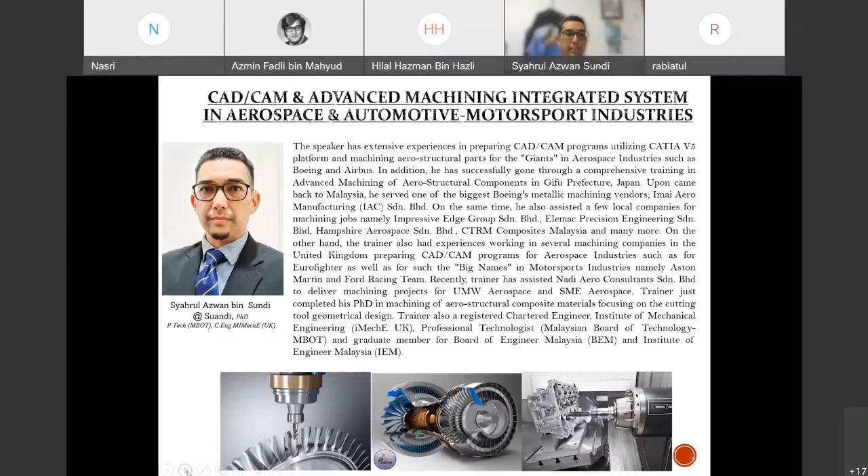Let us glide through some introduction on what CAD-CAM basically is. Computer aided design, that is CAD. Normally the industry out there definitely embeds or adopts a CAD system in their current daily production, so it's very vital and important nowadays. Almost every company and industry out there adopts this kind of system.

The CAD system allows us to do design and validation of the design. Then when it comes to CAM, computer-aided manufacturing, this is where my expertise comes in. Once we have designed everything in the CAD system and visualized it, we want to make it a real physical part - that's where CAM takes place. Basically in CAM we prepare the toolpath for CNC, computer numerical control.

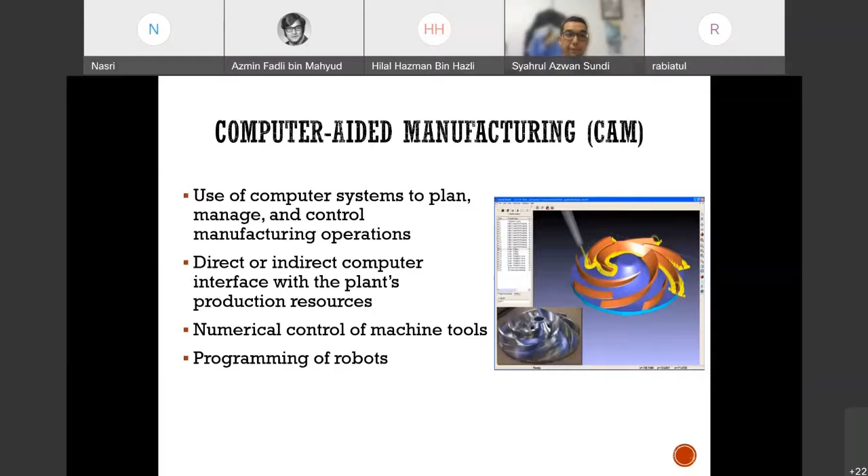So that is the toolpath we have prepared in the system, then we translate it into the controller. Once posted into the controller, the machine will actually machine according to the toolpath created in the CAM system. So CAD and CAM integrate together in the virtual world before we translate into the real machining world, the physical machining part.

Nowadays, almost every precision industry calls it virtual brainstorming - every single thing you have in mind, you translate into a 3D CAD model. This makes it easier for others, the layman, or the rest of the department to understand what's in your mind, so you can put everything into the virtual world. That's why full digital prototypes or 3D systems translate into the prototype.

These are the so-called end users of the CAD model. Once you have the design, the CAD model already established, where can we post this CAD model or design? Normally the most famous in industry is CNC manufacturing - that's where I'm currently in right now, my field, and of course the rest of the team as well.

Then there's rapid prototyping, part of IR 4.0, Industrial Revolution 4.0 - 3D printing, rapid prototyping. We also have automation, design, detail and form, visualization, and part of it going into simulation analysis.

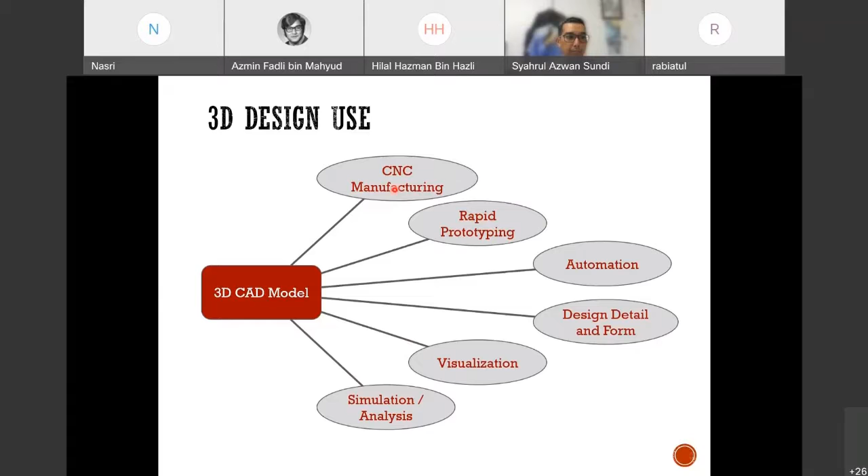All right, so this is the 3D downstream benefit. We have CNC manufacturing to manufacture one, and then we can do mass production of this from the CAD system and the CAM system that we have translated.

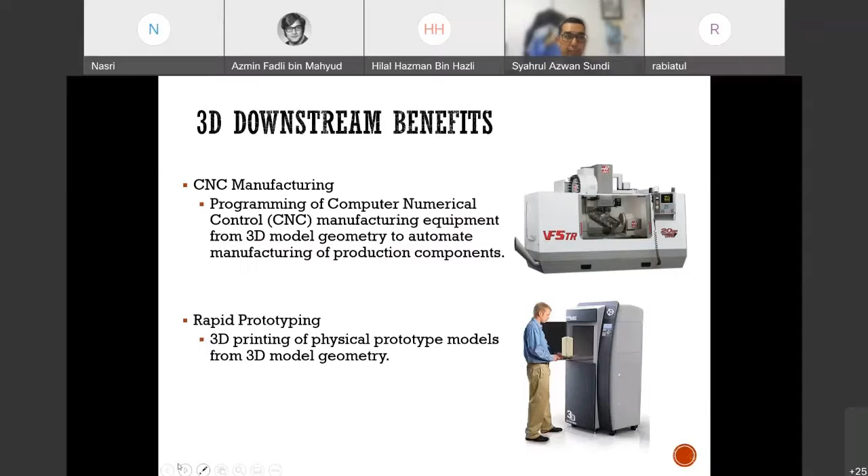Besides that, we also have rapid prototyping that I mentioned just now. Based on the design that we have created, we can validate the design by using rapid prototyping. The design detail form is how we can put everything based on our design. All the details of the design can be translated to physical parts

from the CAD and CAM system that we have. And last, I think, is simulation and analysis, which we mentioned just now. We can do certain simulation and analysis, stress analysis for example. We also have other analysis, such as CFD, computational fluid dynamics, which can also be done in the software right now, before we proceed with the next stage, which is the prototype stage.

All right, this is some fundamental, basic understanding or knowledge in terms of CNC. Once we have the CAD system and CAM system in place, when we have created the toolpath, we have to translate and transfer everything into the CNC, or so-called computer numerical control.

So based on the machining, we have various types and configurations in the market right now, and various brands that I can share with you guys later on. So this involves all the axes in the machining, and this is part of the 5-axis machining involved. We have all this as part of UTEM facilities in the shop floor, in our laboratories.

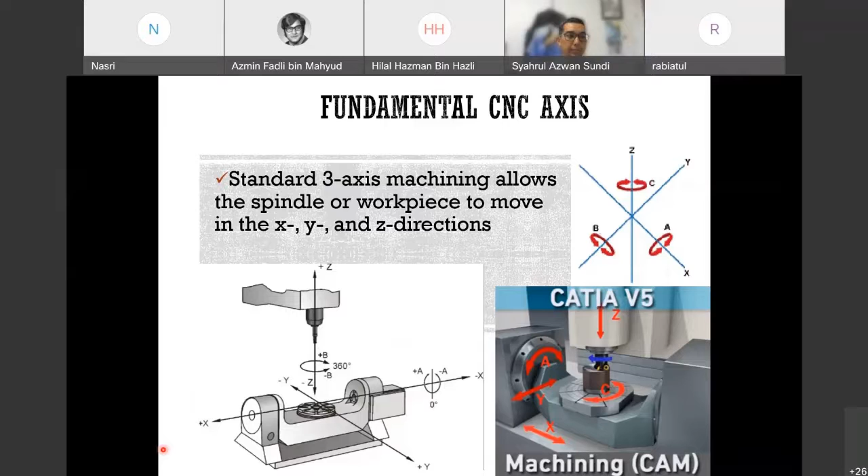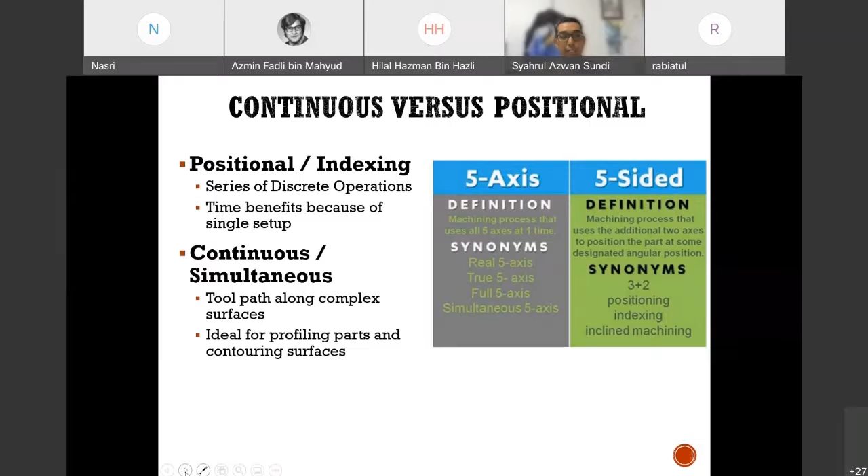This is also a kind of variation when people are talking about 5-axis. Nowadays the designs are getting more complex, more sophisticated. If you can see, or realize, the design of cars right now is totally different compared to 10 or 20 years ago. So totally different, and the challenge to manufacturing is definitely very, very high. That's why we have to have this kind of recent technology to support the manufacturing processes.

These are examples of solution providers or software available, some of them really focusing on CAM field rather than CAD/CAM. These are the ones available in the market out there: CATIA Machining, Hypermill, NX CAM, SolidCAM, Power Mill. As far as UTEM is concerned, we are focusing on CATIA Machining, which will be our first core business or core subject embedded in our curriculum.

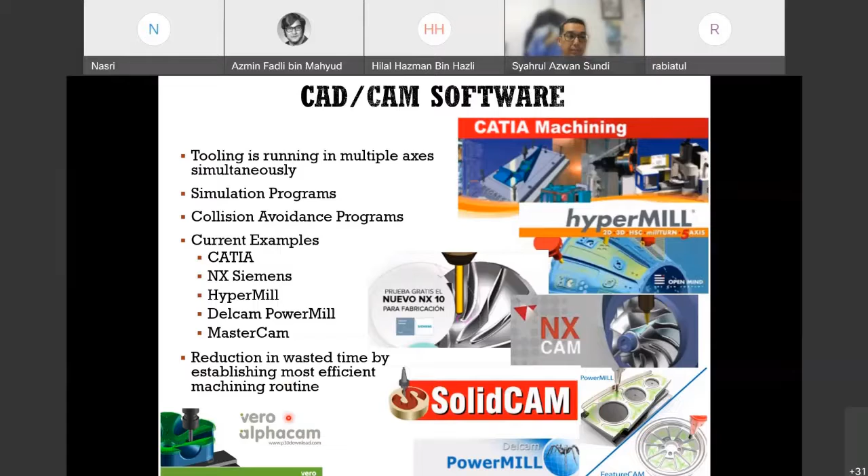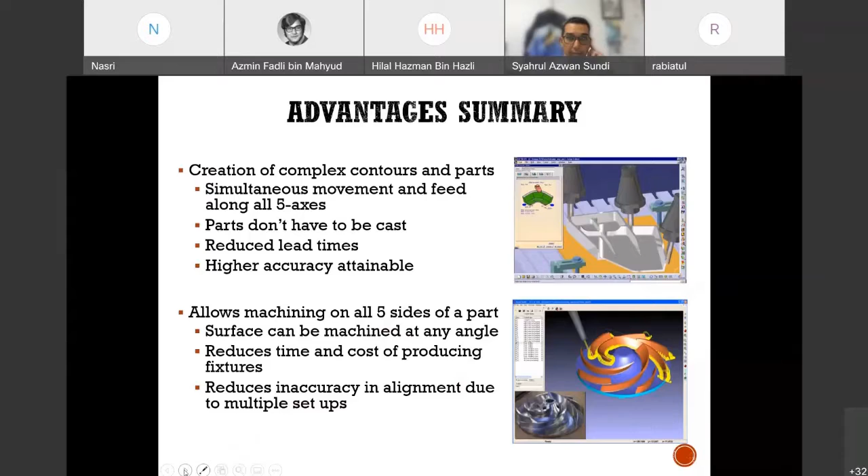The accuracy of the part will definitely increase. This is also an advantage in summary - with the 5 axis in place we can approach a certain area with only a single setup, machining this area, that area, and other areas by holding only a single setup. This is a quite famous part always machined by using 5 axis, we call it turbo machinery turbine blade, which is also involved in complex machining and CAD/CAM system.

Besides that, we also have the disadvantage, which is related to the large investment, because the machine is not that cheap, and the solution system is quite expensive as well.

CATIA itself will cost the company more than 100K Malaysian Ringgit to invest in the first stage. Then they have to groom a highly skilled programmer to create the cutting tool or toolpath program. And finally, of course, the maintenance of the machine will also incur a certain cost. So that's part of the disadvantages of embedding this kind of system.

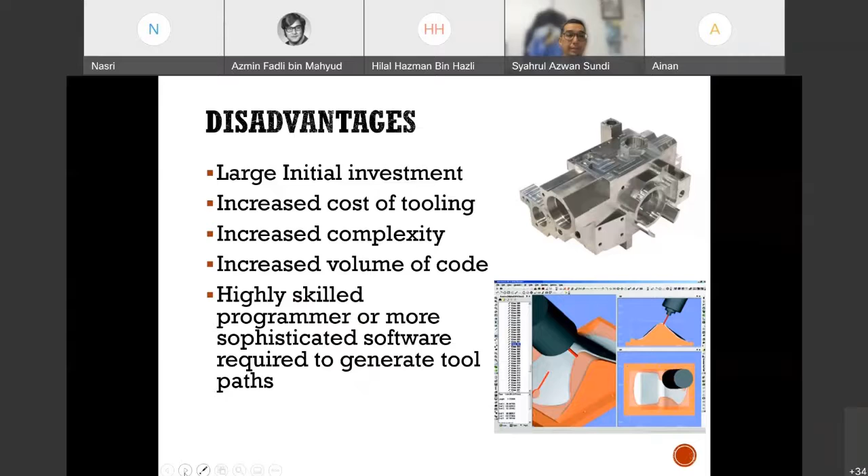From now on, I would like to share a little bit based on CADCAM and advanced machining systems. Some examples that I've gone through with industries out there, and then probably we can realize how important it is that we need to really stand together with the industries out there. So we do have all those facilities in-house.

We do have the software also in-house. In fact, we've embedded our curriculum with the current demand of the industry, with the current software that they've been using. So definitely we can actually be together with the community as well as the industries out there.

So this is just a sharing of how I myself started to jump into this area. There were a few of us, four of us, who went to Kakamigahara, Gifu to go through the training for 3 months before we came back to Malaysia.

And then this kind of example from the CAD and CAM system, how we translate it into the CNC, and finally we produce the actual part. So this is an example of a project that we carried out with CTRM, our neighbor actually. There are a few projects that we have gone through with CTRM, thank God on that.

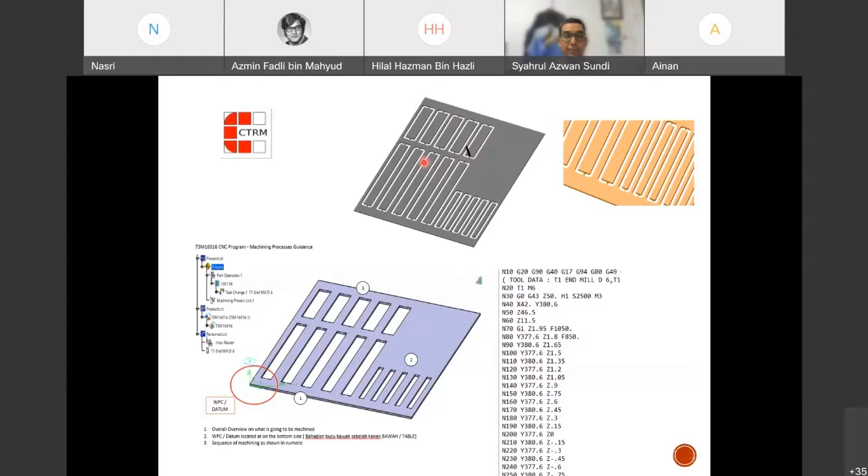So we do have the CAD provided by the company, and we need to create the toolpath, the so-called CAM system. Finally, this CAM system or toolpath will be translated into G code and M code, and this will be sent into the machine before we do the physical machining. This is also part of it.

We can actually just create the toolpath, how we're going to do what we want in the toolpath, and the next pass, the movement of the tool from one point to another, the type of cutting tool, diameter, and everything. You have to define everything. Then the system itself will translate it into the program, so we just put it inside the machine and do the setup. But of course, the fundamental knowledge of machining, cutting tools, and cutting strategies, we have to have that knowledge before we can go into this phase.

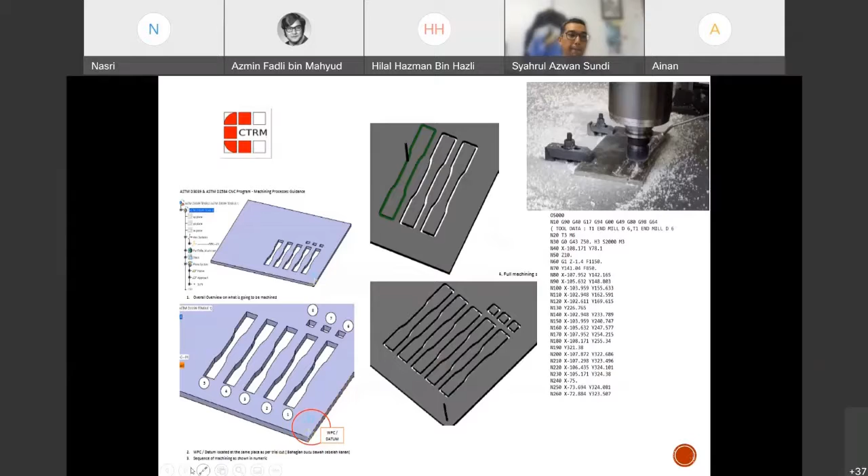So this is part of a project that we have gone through with CTRM. It's part of aerospace, but this is not a flying part. This is an example part.

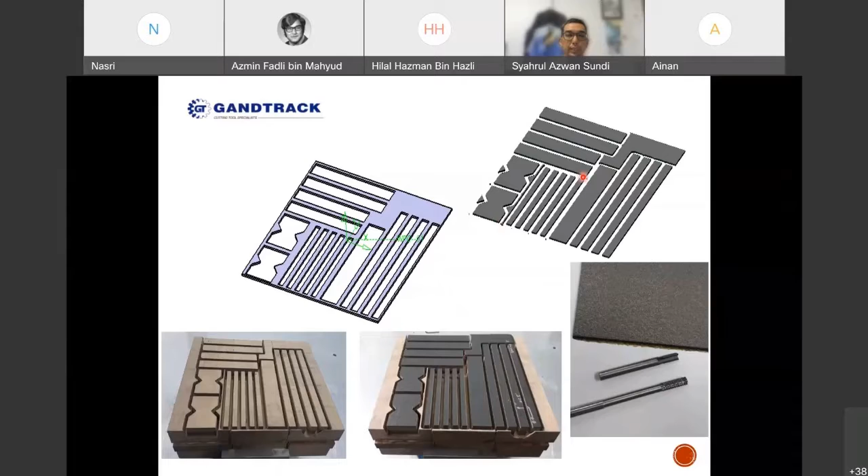This is another example of validation of composite material. Before this, it was glass fiber reinforced plastic, GFRP. This is another different material, but a very famous one used in aerospace and aerostructural industries - CFRP, carbon fiber reinforced plastic. We have different cutting tools, and what we did was trim it to a certain ASTM standard for them to do the validation.

This is also another project which also involves a CAD system. From the CAD system, we translate into the CAM system. We have the cutting tool, we have all the shapes that we want to machine, and finally we produce the actual part.

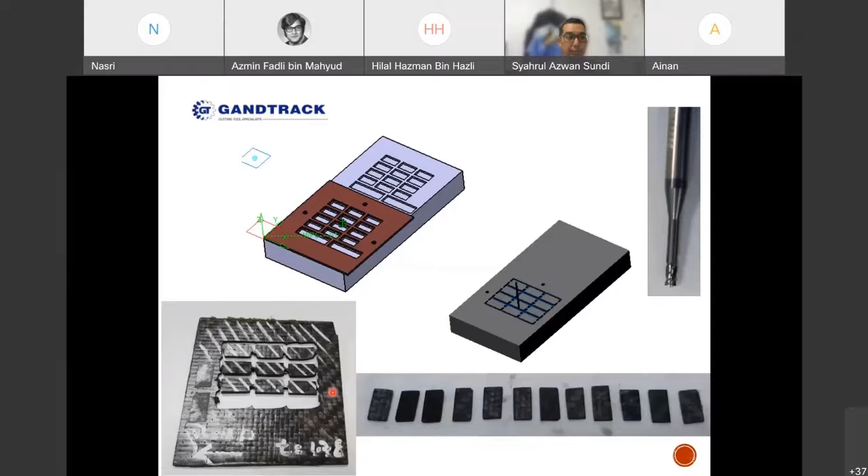All right, this is another example. This, if I'm not mistaken, was the first trial of wet panel or out-of-autoclave panel. So Airbus tried to produce a composite panel without the curing process of autoclave. They succeeded, and this panel is already being used for A350, if I'm not mistaken.

And this is also an example of the beauty of the CAD system from a so-called 3D scanner, part of rapid prototyping or 3D printing. We have a 3D scanner which we use to scan the geometry of this cutting tool, and we can actually do any measurement from here, extract all the data, and reverse it at any time. So this is part of reverse engineering, also involving a CAD system.

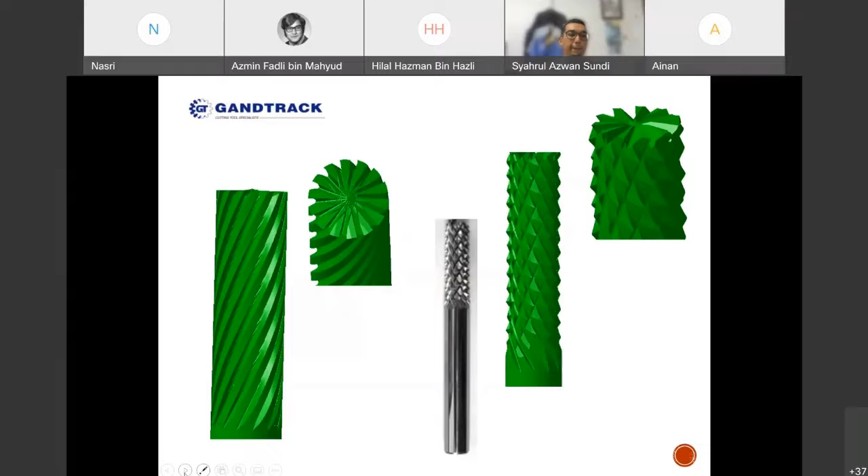All right, this is also another example, but it's a different material. This is a metallic material, and this is also part of a trial phase, trial progress in our laboratory. As you can see, this also involves a CAD system and translates into the real machining.

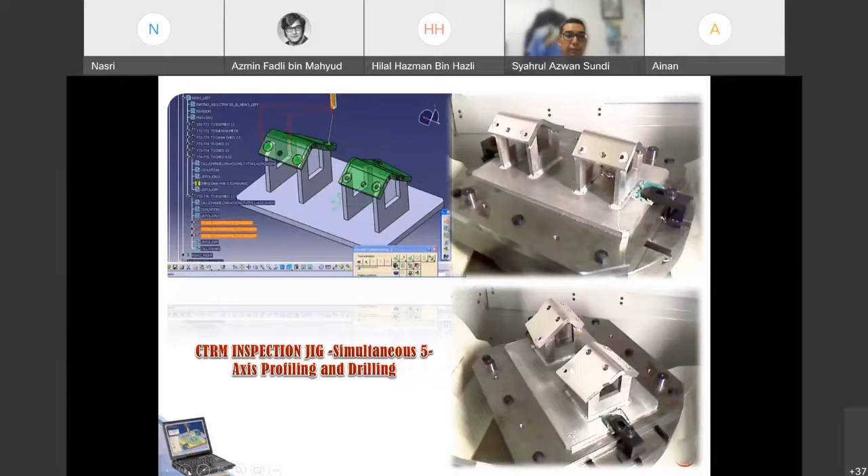All right, so this is also a real part, but it's not a flying part. This is an example of fixture or tooling. This fixture needs to be produced for CTRM, for example. They produce the composite restructuring material, so they have to lay it out on top of this tooling or fixture. We have involved nearby industries to provide this kind of service.

This is another example where we are given the CAD model for how to produce this one - not only the knowledge or skill of how to use the software, but we have to have the skill of how to perform the real machining. Being an expert in CAD/CAM software is not enough to produce a high precision part. We need different knowledge and skills in different fields to produce a certain specification given by the drawing.

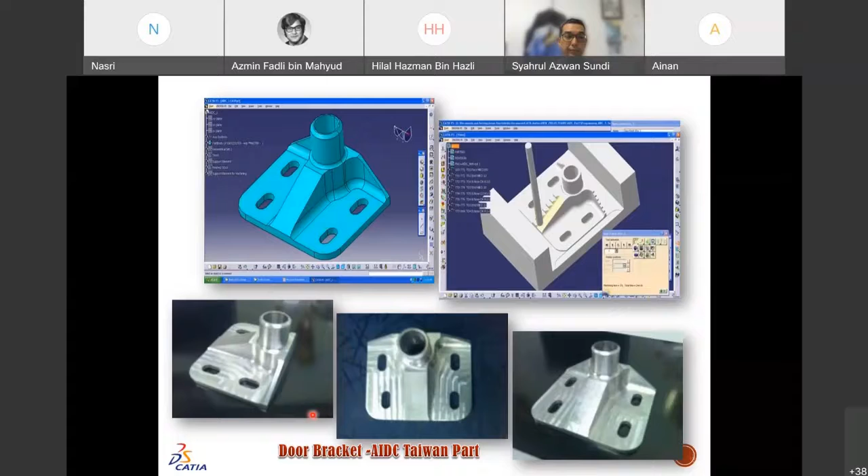For example, this is part of an actual flying part from AIDC Taiwan. It was produced, if I'm not mistaken, a few years ago. This is part of FAI, first article inspection.

So we do have the CAD system over here. The CAM system is not shown here due to certain secrecy. But anyway, what we can see from here is how to translate from the virtual to the actual - the CAD and CAM system will actually be involved in order to assist us through the whole process to get the physical part. This part is going to be the one that our client or customer needs, and this is the final business of the industries, especially in aerospace industries.

So this one is very challenging, because if we fail to produce or make any mistake during the machining, the whole piece will be rejected. So the cost of the whole piece is definitely very expensive. That's why we have to be very, very careful to produce based on the specification given, and ensure there is no mistake during the machining or during the programming.

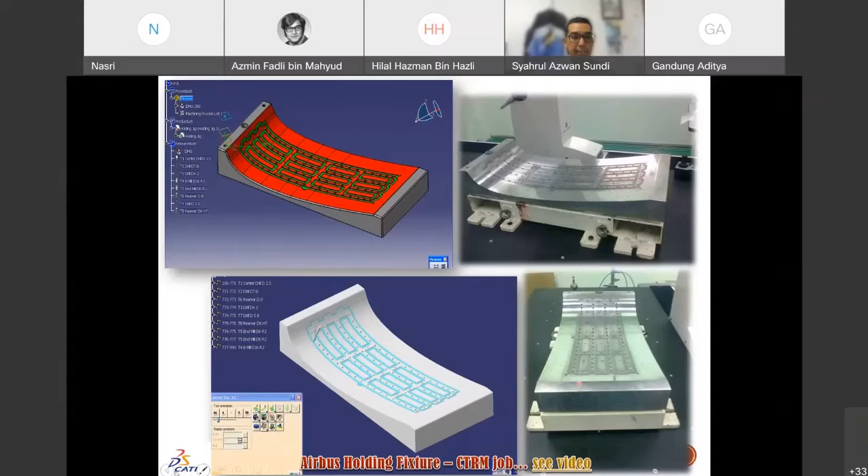All right, so this is another example of a flying part. The previous example was a tooling fixture; this is the actual flying part. What we can see from the CAD system, we do have the table - an example of the actual table created in the CAD system, in 3D. And then we have the fixture or tooling, and the flying part to be machined on top of the whole system.

So what we have here is the whole system created in a 3D model, embedding everything inside one system. Then during the machining, we can actually visualize and simulate whether there will be any collision or not before we proceed to the actual machining in the CNC machine.

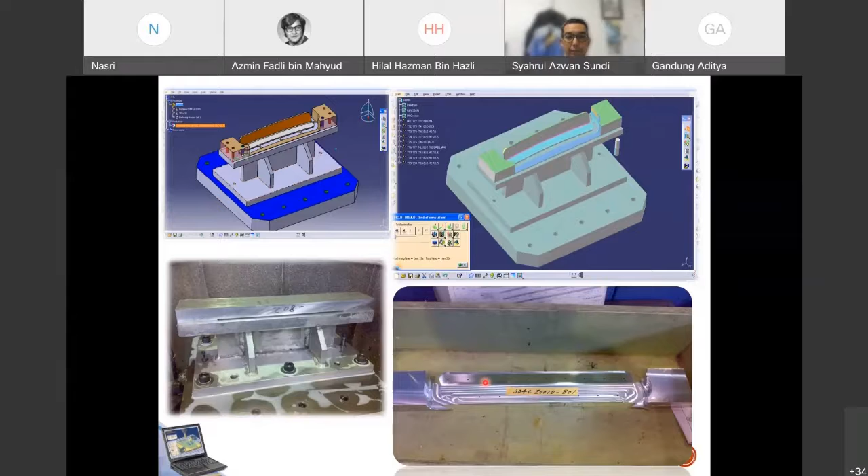And this is the final product that we have produced. All right, this is kind of overall sharing that I can share with everyone on the shop floor. What we have over here.

Well, this is a current practice in actual aerospace industries. What we always have during the discussion with the client and during the so-called bidding process before we secure the project, we always provided the CAD model. So the client always provide the CAD model in order for us to know the difficulty levels of each part that we're going to machine.

So based on this CAD model, we need to create so-called cutting planning. This cutting planning normally needs an experienced person, normally 1 to 2 persons in one industry. They have been working for more than 10, 15 years. They have more experience in terms of how is the best clamping system in producing this part.

So once we have this one and created the so-called virtual cutting planning, then we have this part. This is the CAM section. So we have the CAD system, the CAM section. We put everything, all the cutting tool, all the specification that we need, and finally we try our best to obtain the part more or less to the one that we have planned earlier. So this one will be translated.

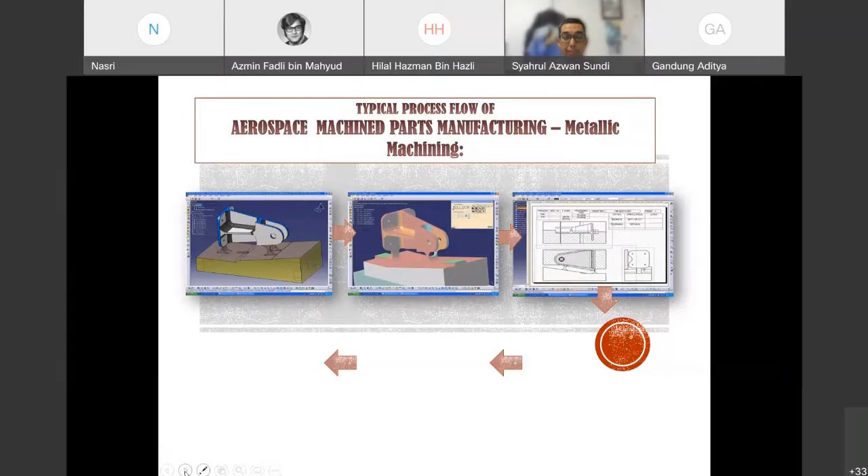Okay, this is an example of communication and documentation. So in an established company, they have very dedicated workers. For example, the programmer is a programmer, and the planner does the cutting planning. They do have the programmer to do the program, and the machinist will actually always be in front of the machine. They probably look after more than one machine at one time. So they don't actually know what is going to happen from one to another.

For example, like one tool to another, which area they're going to machine first, which one is going to cut off first, and the position of the cutting tool, where to go, where to start. So this is kind of documentation that the programmer and the machinist can communicate with. Based on this documentation, they should actually know what is the next process to carry out. So based on this, it's kind of a physical simulation before we go into the actual machining, and finally we got the part as per plan, as per CAM that we have created.

So this is the beauty of CAD-CAM system and advanced machining. When I first studied and when I first got involved in this kind of area, I hardly believed that the part that we have created and designed over here is going to be resulted exactly based on the CAD system or the CAM that we have produced. But believe it or not, in actual situation, the machine will try to translate everything that we have created here.

As far as we have a very so-called high compatibility machine controller, as well as the CAM system. So the CAD-CAM system needs to communicate with the controller in the CNC machine with good communication. The compatibility is very important. So that's why if we have that, then we don't have to worry about producing a part not according to the design that we have produced.

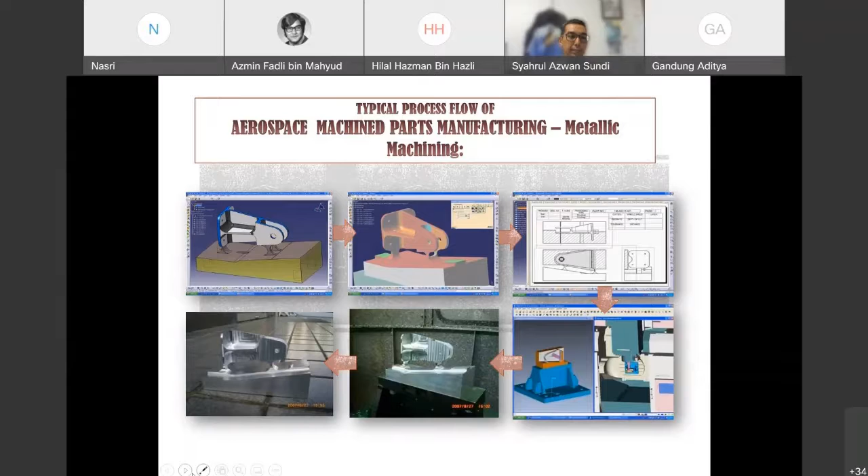All right, this is just a brief, short sharing. So this was last year's project, and this is an actual situation where this is one part number. This part number needs to be produced at one billet. We call it billet, the raw material. At one time, 3 pieces in one shot.

So this is the cutting planning, so-called. And this is a CAM. All right, so we do that. A programmer or a CAD-CAM programmer or CAD-CAM engineer needs to be able to produce this. So he or she needs to actually have certain knowledge on cutting planning. So this is the cutting planning using the CAD system, and then we jump into the CAM system to create the CAM toolpath. Once created, then transfer into the machine.

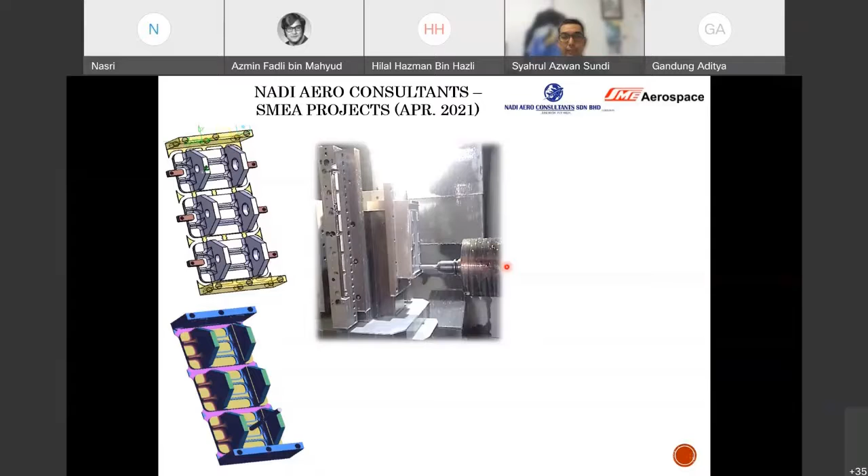If you look over here, this is not a vertical CNC machine. This is a horizontal CNC machine. So this is the material, the raw material given. Now the machine is actually performing the roughing operation, and this was the real raw stock or raw material given, and finally this is the final result.

If you look over here, this is all the clamp placed next to the material, next to the part of the machine, and it's already placed here in actual condition. So if we follow exactly what has been planned in the CAD and CAM system, we definitely will get the actual part as per design.

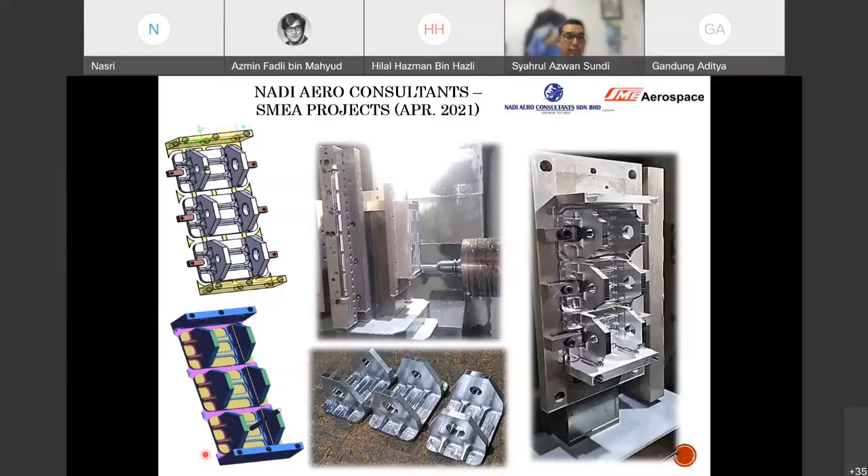So it's very important to communicate between the programmer and the machine as well. The communication is very vital in this case. Otherwise, we're not going to produce the part according to the specification that we have requested, or probably that already stated by our client.

All right, next I would like to share a little bit on the involvement. I would like to invite the rest of my colleagues over here so we can actually contribute back to the industry, because although we are the academia or so-called lecturers, we are really needed in industry to collaborate with them, because academics plus industries can definitely produce a superb result rather than only one-sided.

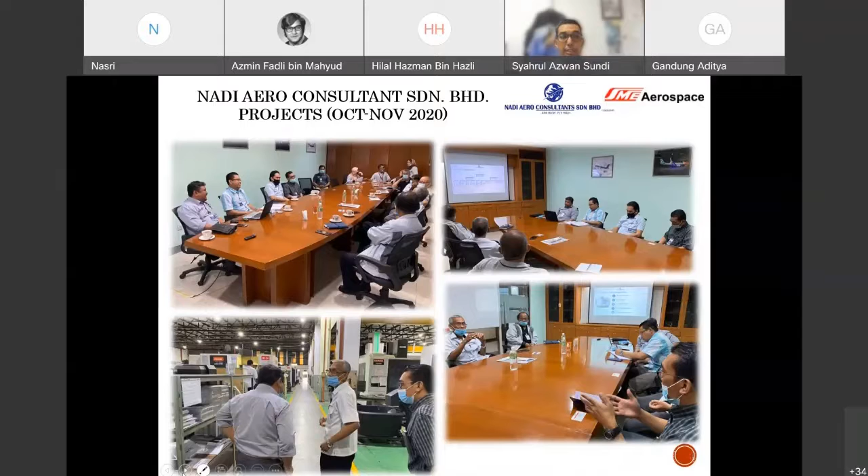This is also a sharing session involved with another supplier or contractor in aerospace, which is SME Aerospace, located in Sungai Buloh. They are a metallic supplier, if I'm not mistaken, for machining. So all the materials inside here are metallic materials.

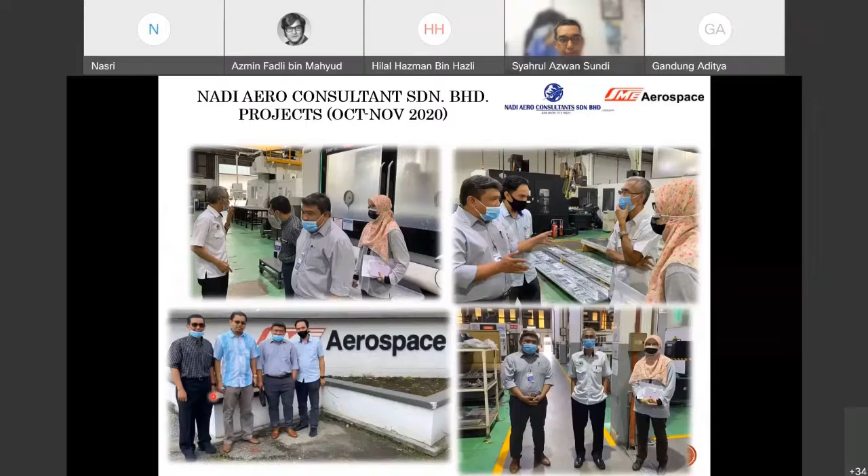This was, if I'm not mistaken, 2020, during the pandemic, and this was last year. I was together with Encik Madran involved in one of the so-called projects with them. So it's a good experience, and I think this is something that I would say is a privilege that we can actually gain.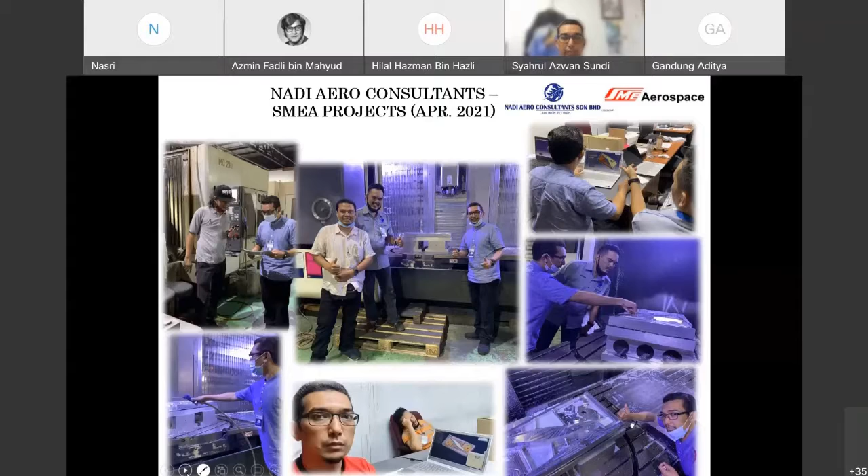All right, so next I would like to share from the point of view of industries, some from industries and some internally from our laboratories basically. So I'm really proud to share over here with this platform with the team that I currently have.

Thank you so much to the rest of the team. Without the teamwork, I don't think that we can actually achieve a very high result. So that's why teamwork is very important in order to go further, to achieve a certain achievement together.

So this is kind of an example of an internal project. This was, if I'm not mistaken, back in 2015 to 2016, where we were really active in producing FV, Formula Varsity. So my team and I were involved in optimization using finite element analysis.

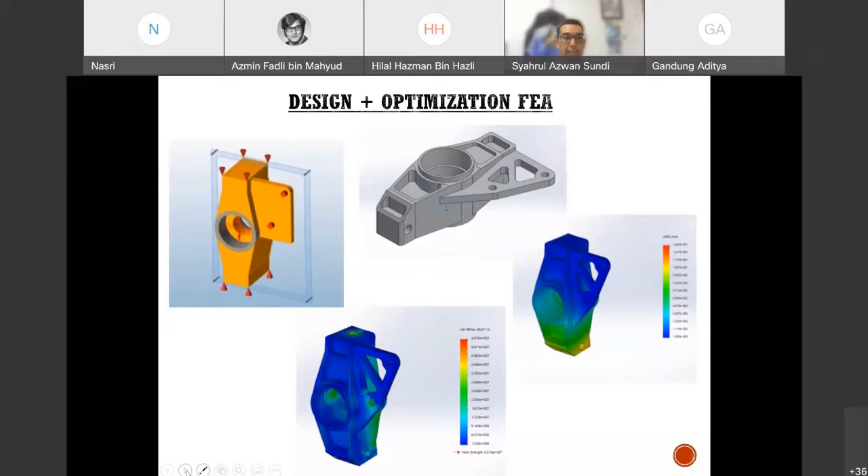So this is one of our final year students' projects, to actually optimize this design. If you look at this, it's really a full material, and then we already got a few holes based on the simulation or analysis. We can see that we can maintain or improve the strength with less material produced.

Once this is validated, it's sent into the CAM system, so this is CAD and CAM. We produce the so-called tool path, how the tool is going to go, and finally we translate it into the so-called NC program and send it into the machine.

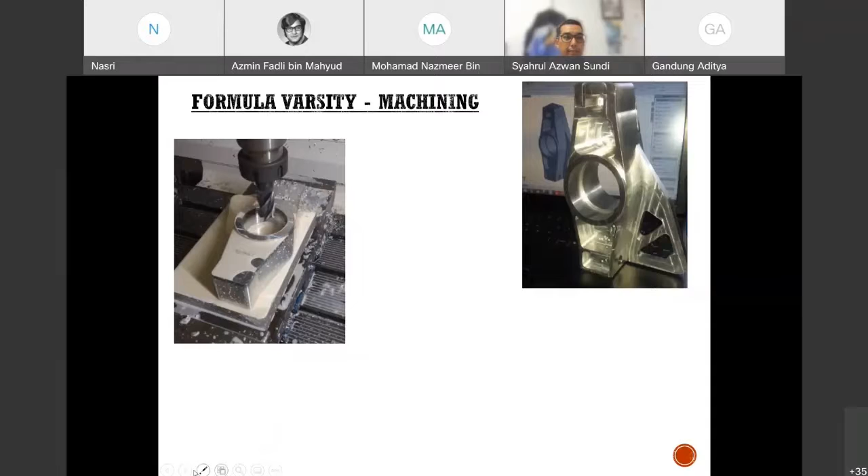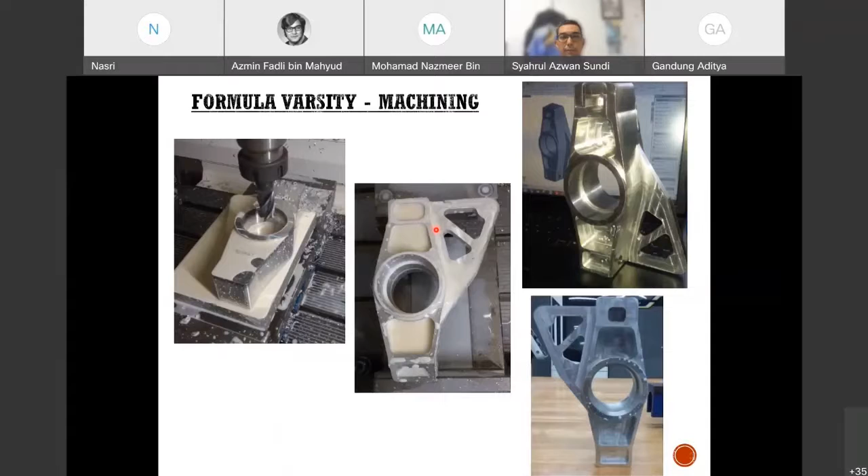During this time, I think we didn't have the 5-axis yet, so we just produced this part using a 3-axis machine. This so-called knuckle was produced using the 3-axis machine, and then it's fixed in 4 different areas. This was produced in-house, so this is an example of an actual internal project.

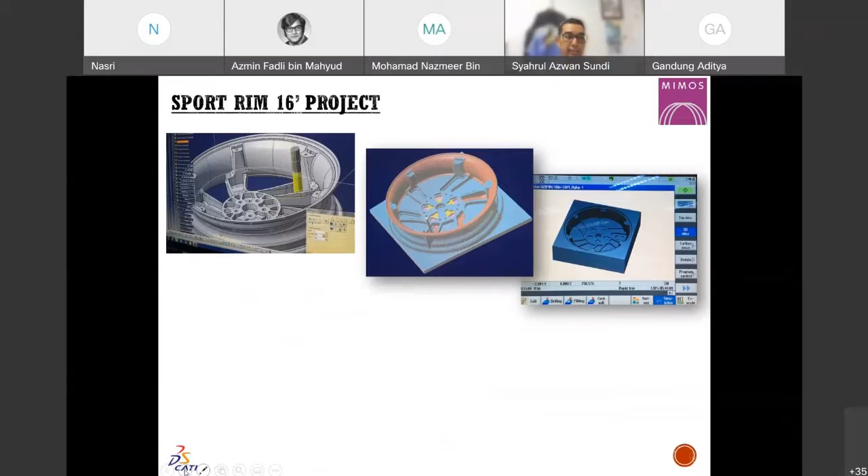The next one I'd like to share with everyone this afternoon is a real project, brought by RPM Dr. Rizal Kahari. This is an example of a real project that we produced in the lab. It's an actual 16-inch sport rim, not for a car, but for an electric motorcycle. It's a project with MIMOS.

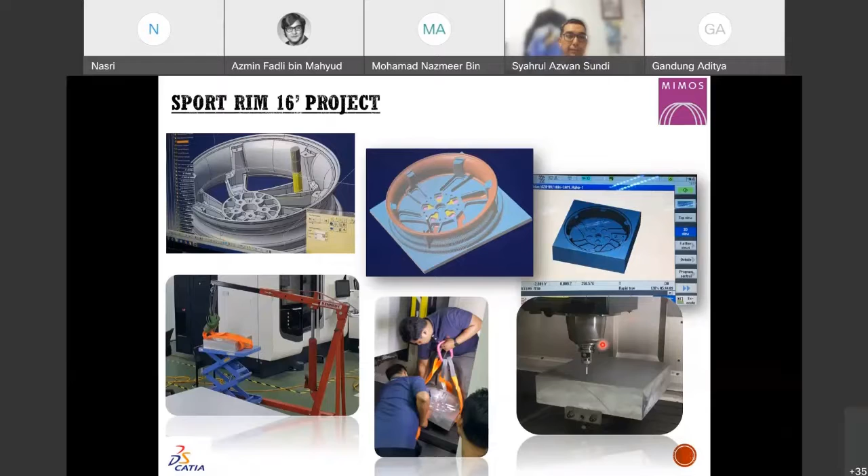That will be the clamping preparation. This is the roughing, semi-finish. We do the semi-finish on the side, both four-sided, and finally we managed to produce very clean and shiny surfaces using 5-axis machining.

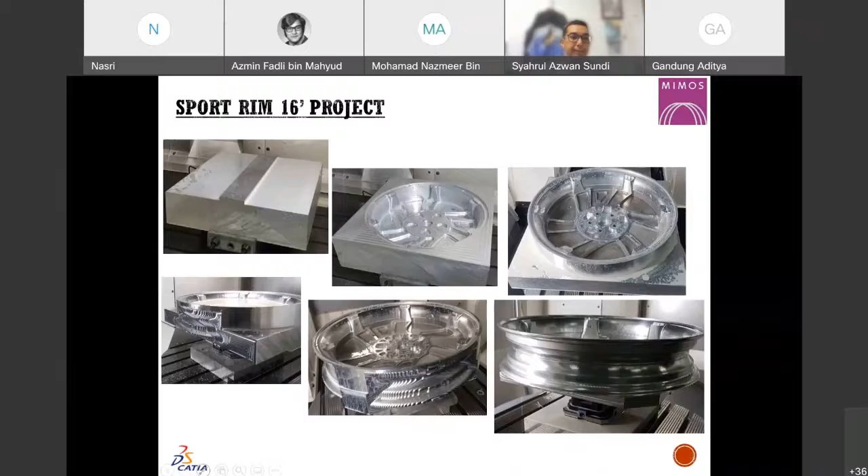Then we flip over the part, and this is very, very important. If we fail to produce this part, the spoke from the rear side won't match with the front side. This material costs about 4,000 to 5,000 ringgit and will actually be scrapped, so we need to ensure the cutting planning is superb and plan carefully, otherwise this project is not going to be successful. So alhamdulillah, finally we managed to produce this part.

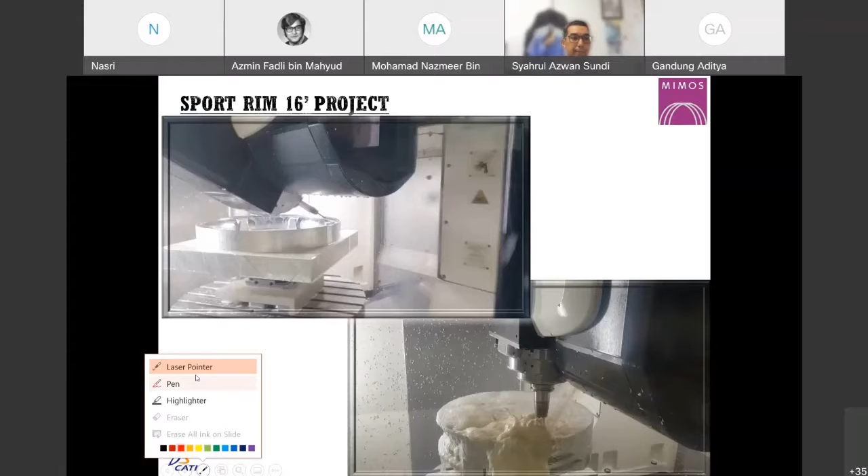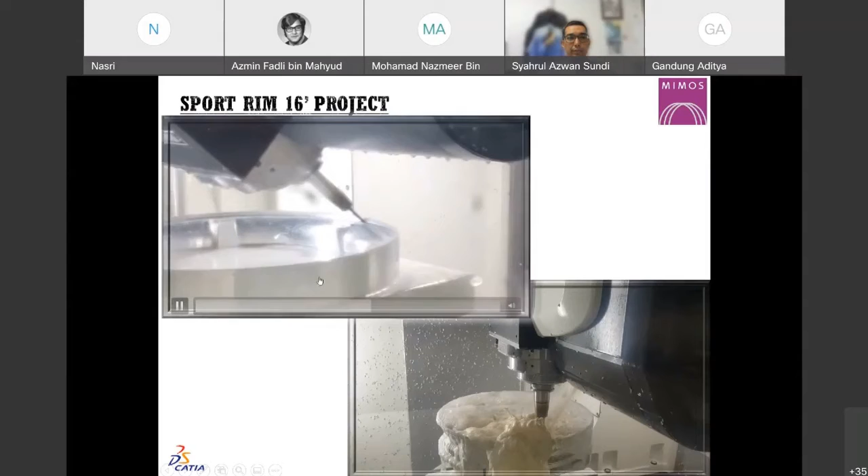Just a little bit of sharing on the actual machining. This is the actual machining taking place, simultaneous 5-axis. If you look at this, it's a very huge material, and that is the cutting tool now producing the outer area.

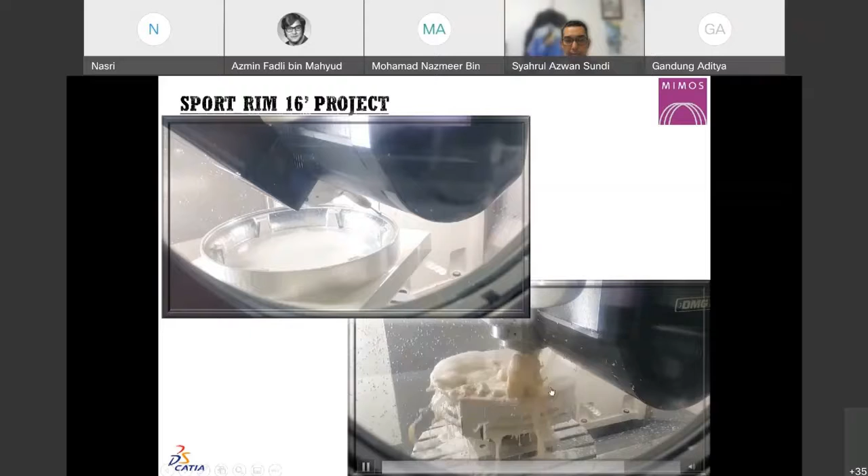At the bottom here, what we can see during the semi-finish process, from the top video, is a square material excess. The bottom here is already finished, already machined. So more or less we have about 60 to 70% completed.

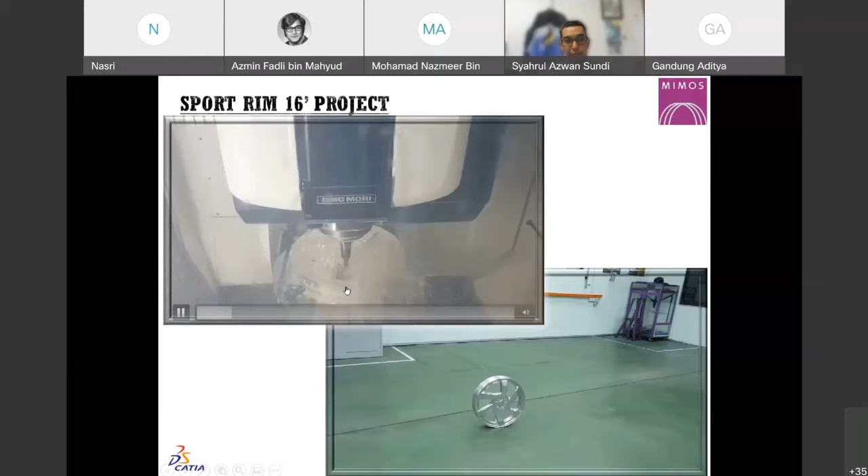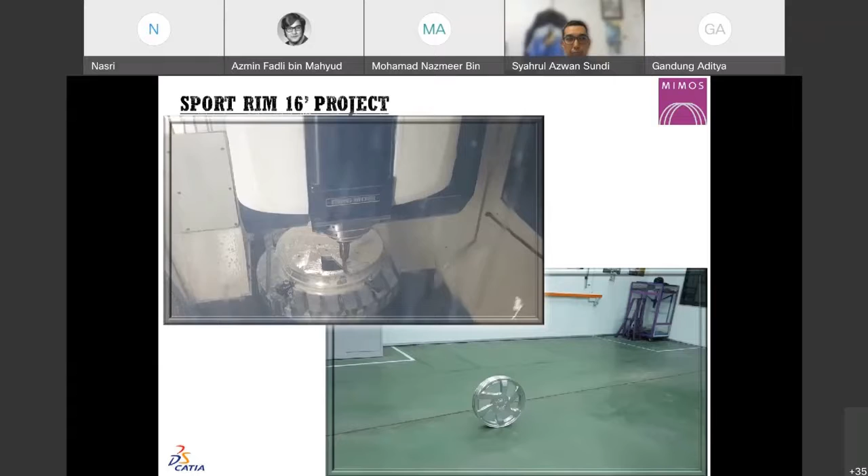The top video is very important for us because this is the moment we were really waiting for, because once the bottom area and the top area are already machined, we can actually see whether the spoke is already matched or not. Without good matching, this material, as I said, is going to be scrapped.

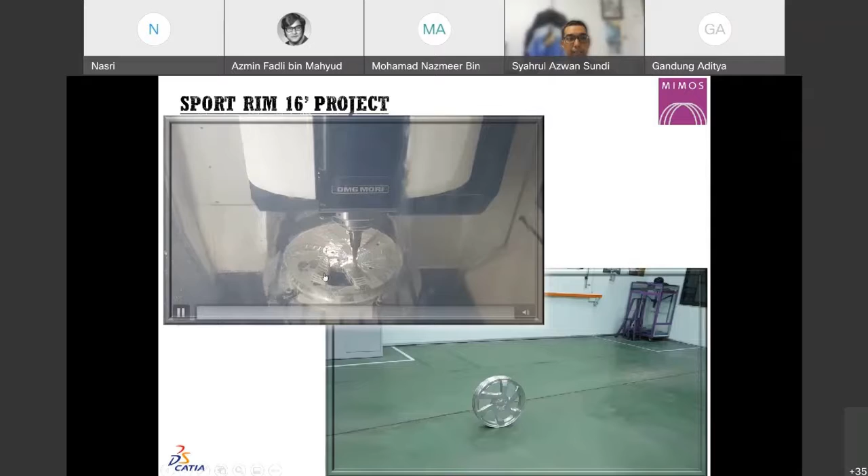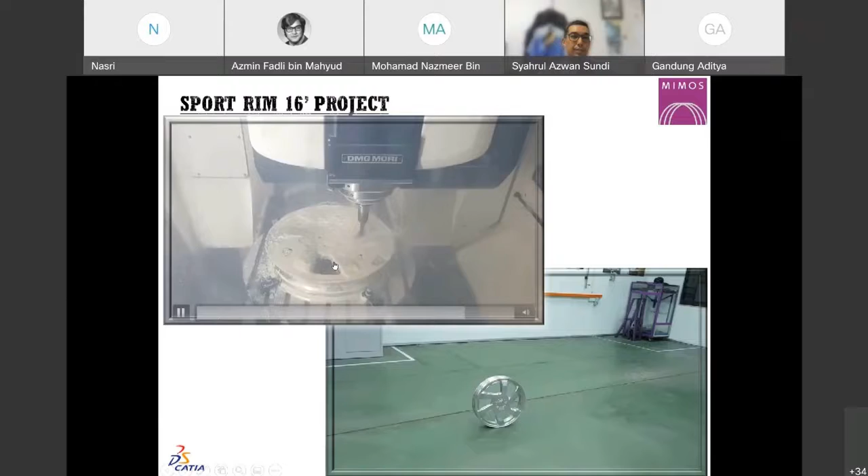It's not cheap, this material is about 4,000 to 5,000 ringgit. So as I said earlier, cutting planning, not only being an expert in CAD and CAM systems, is not really sufficient to produce a high precision part. We need all that knowledge like machining, cutting strategy, cutting tool technology, as well as cutting planning in order to produce a high precision part like this.

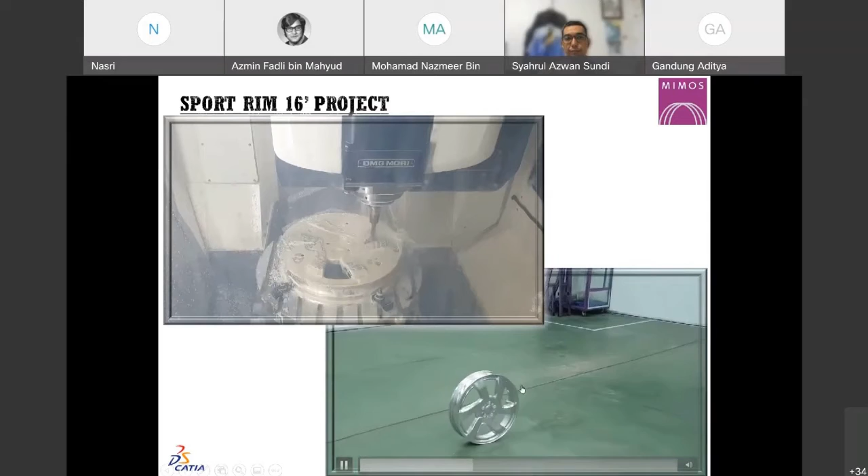Last but not least, this is the actual part out from the machine without the polishing process yet. So this is again, as a result, the machined part without polishing. We can see it's very shiny. Okay, so it's kind of satisfying.

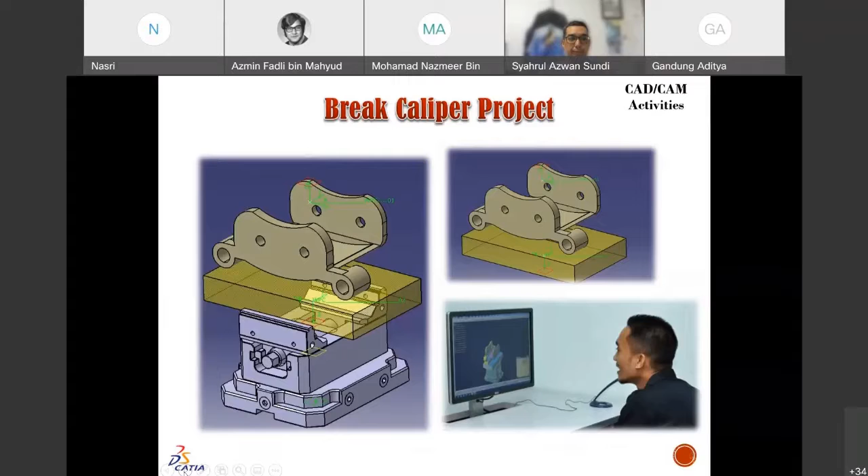Right, so this is a machine, as Azmin is the expert of the CNC machine, I mean myself. This is another project that we have gone through before, we call it a brake caliper project, but with different material. So this is quite a hard material.

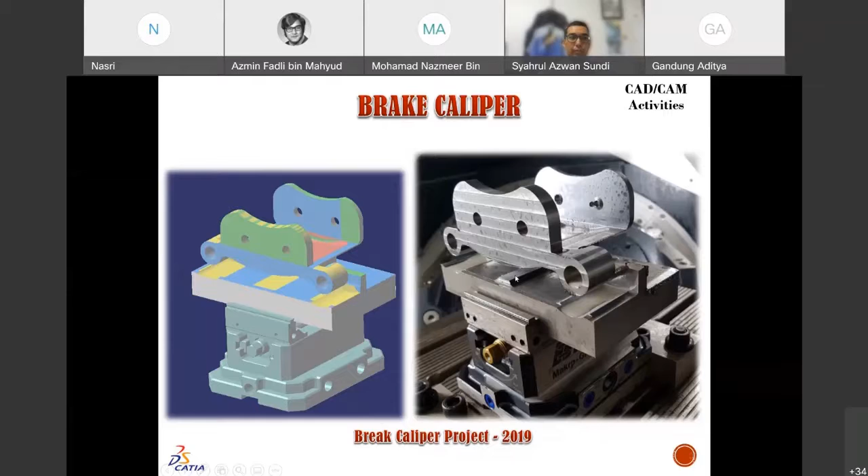We gained a lot during this time because of the cutting planning. If we fail to do this, this is the second part that we machine. So the first one was rejected due to the accuracy, so we had to redo, recreate and replan again to make sure the final product matches the specification given. This is, if I'm not mistaken, a mild steel hardened material, so it's quite hard and difficult to machine.

All right, with the time we have, not much, just a little bit of sharing with you guys. Probably this is a small experience that I gained in UK. Basically it should boost every one of us to try to collaborate or work not only in Malaysia, but to trust ourselves that we can actually work with the rest of the industries in the world.

So this is the first company I worked with, being a CADCAM programmer. This is part of the motorsport industry, Ford Racing. My job was to produce the cutting planning. So this is all this fixture, I needed to plan all this fixture before, and the biggest challenge here is most of the parts were the casting part.

As we know, the tolerance of the casting part is not the same as what we produce from the billet, from the whole block. So that's why it's very challenging to plan the right fixture to machine this part.

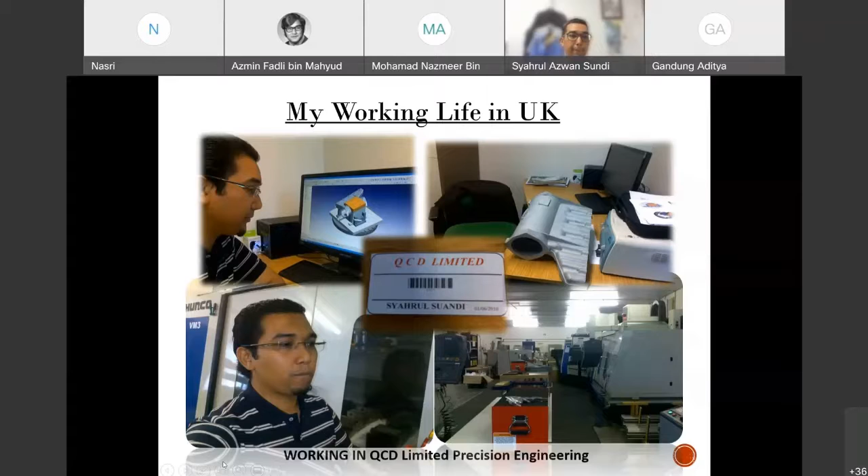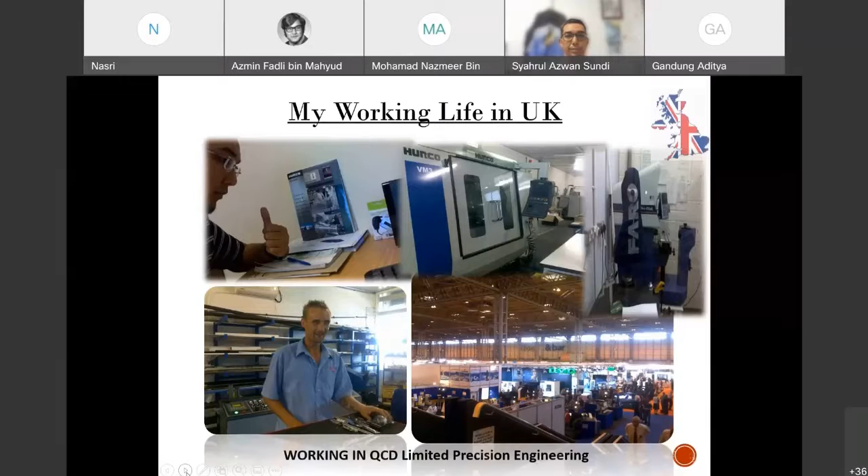Then this is the part again, showing how to produce a certain area that needs to be machined. Of course this part is very expensive, so we need to plan carefully before we send it into the machine.

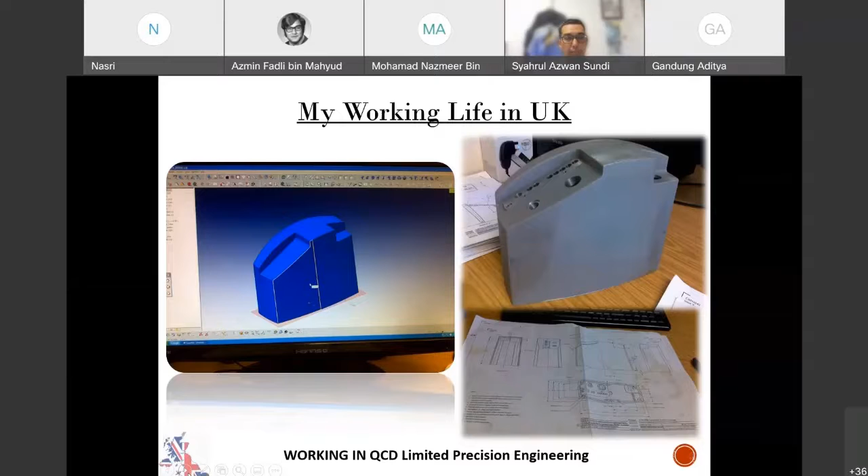This is another project, to redo from the drawing. This is not related to machining, but again related to the CAD system, how we manipulate the CAD system to produce multiple parts using only the given drawing. So this part was not provided with the CAD model, and in order to produce a good, high accuracy part, we need to have the CAD model. So what I needed to do was recreate this from scratch, from the drawing. This software, if I'm correct, is Hypermill HyperCAD.

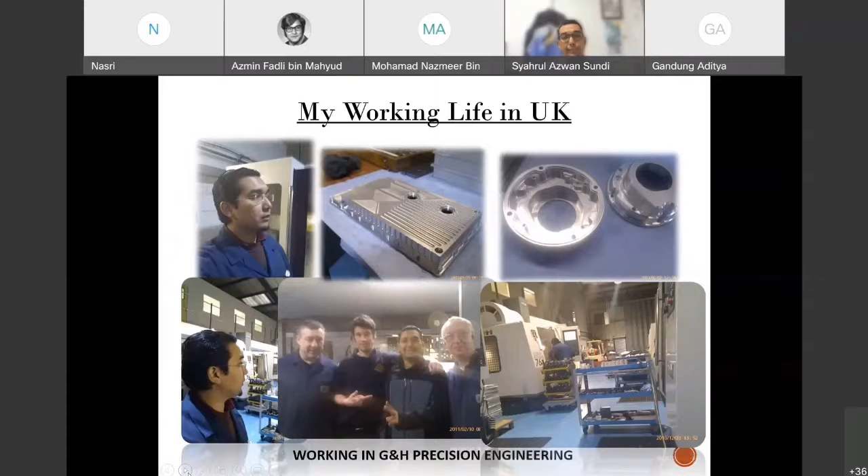This is another company, I got an opportunity to jump into another company. This company is quite close to where I've been living. So this is part of my experience working with a so-called overseas company, and of course the experience and knowledge we have will actually assist us to ensure we can survive in this kind of company.

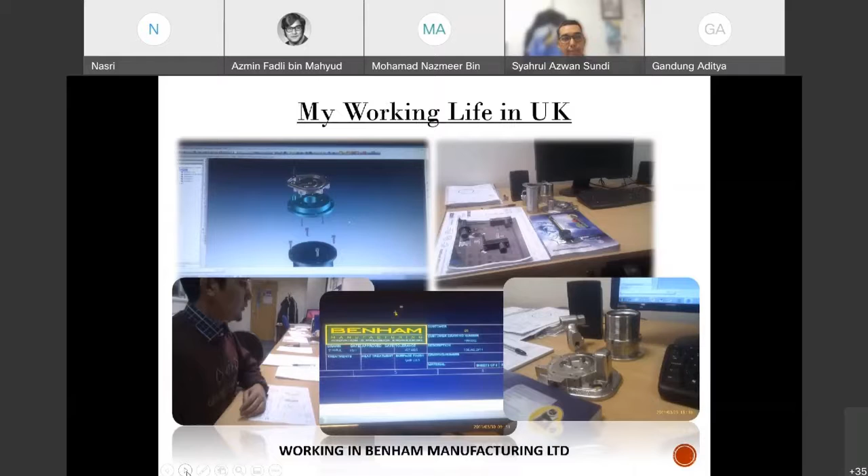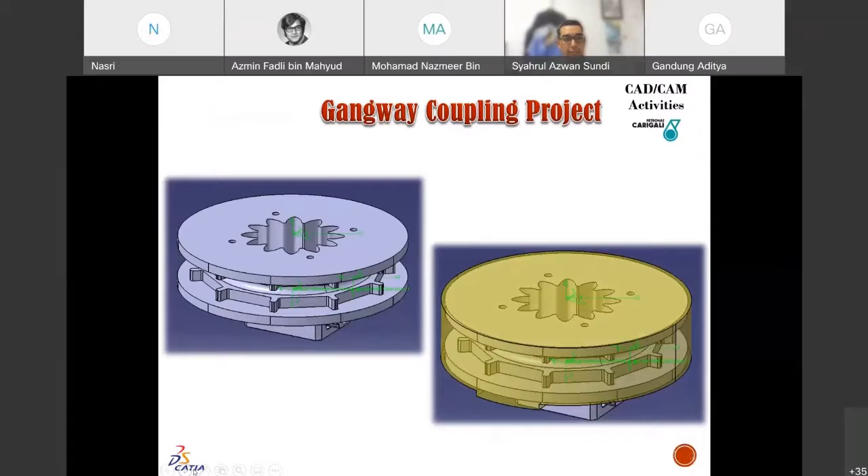Right, these are the rest of the CAD models involved. Just a quick one, I'll just browse through the slide, a quick sharing with all my colleagues today. So this is an example of another project that we did, we successfully managed to machine this part in the lab.

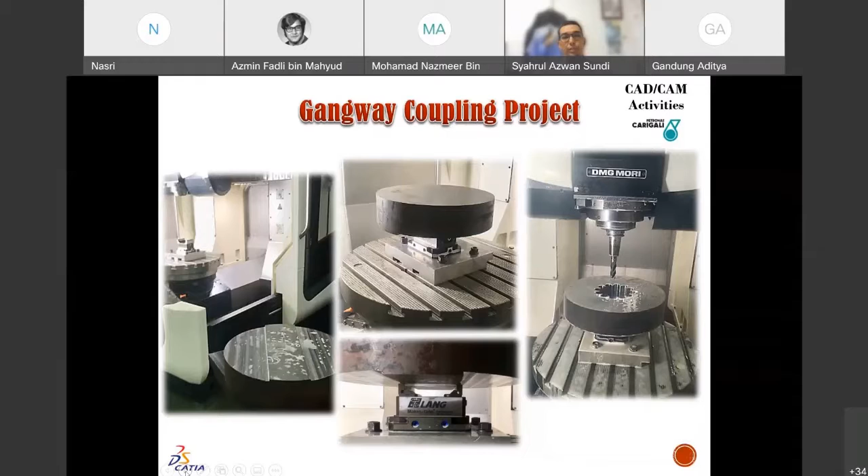All right, this is also quite a challenging project with Petronas. I would like to quote this project, also brought by Dr. Shukri. This is very hard material, and alhamdulillah we managed to produce this part as per the drawing, as per the requirement from the client.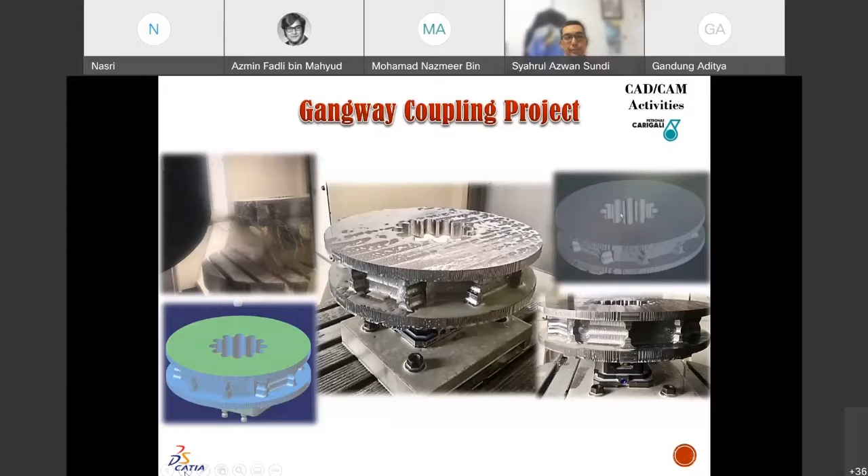So that's why we have to believe in the system, and we have to make use of the system to the maximum level of flexibility offered by the solution.

And this is kind of an example, if I would allow to share this one. So this is part of very slow machining, I would say, because this is hard material. We cannot go fast actually. And this is basically the same approach that we did for the spot rim before this.

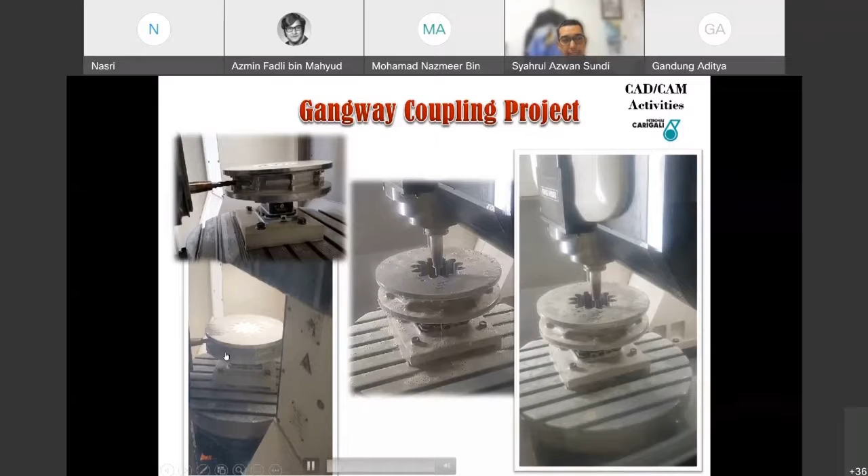Right, so this is the final one. If you look over here, so almost there. This is the machining for the central area, and then this is machining for the side cutting or slotting.

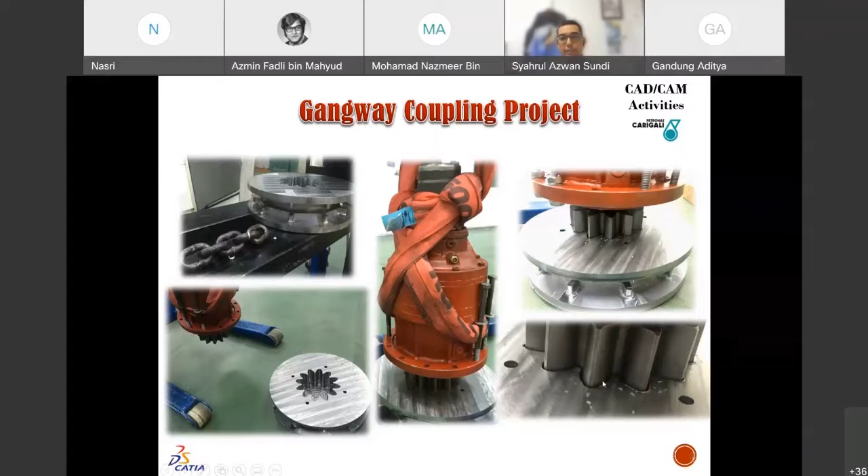And then we have the final part now, which is already machined. And then we actually brought the motor to try to do the fitting. So once we do the fitting, it's already fit and matched based on a certain tolerance that's required. Then we put it again inside the machine and do the final finishing. And this is the picture for the final finishing with the complete full assembly.

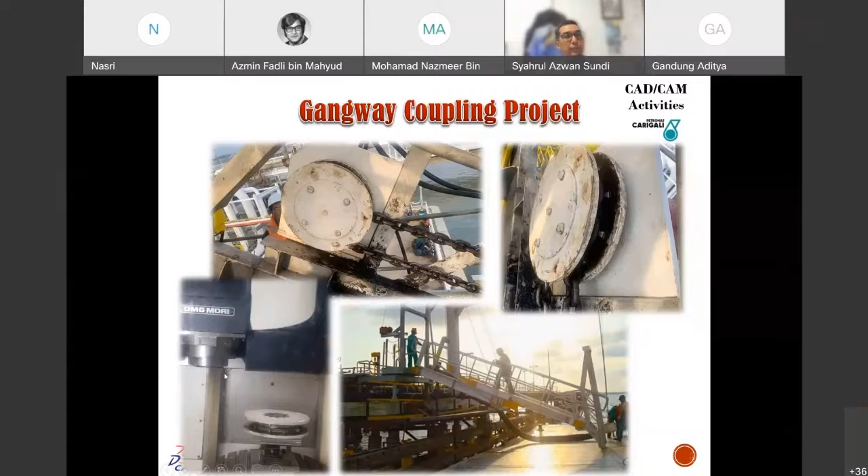And this is an example, the actual example in the real application. So this is called Gangway Coupling project. It's located, if I'm not mistaken, somewhere in the port in Malacca.

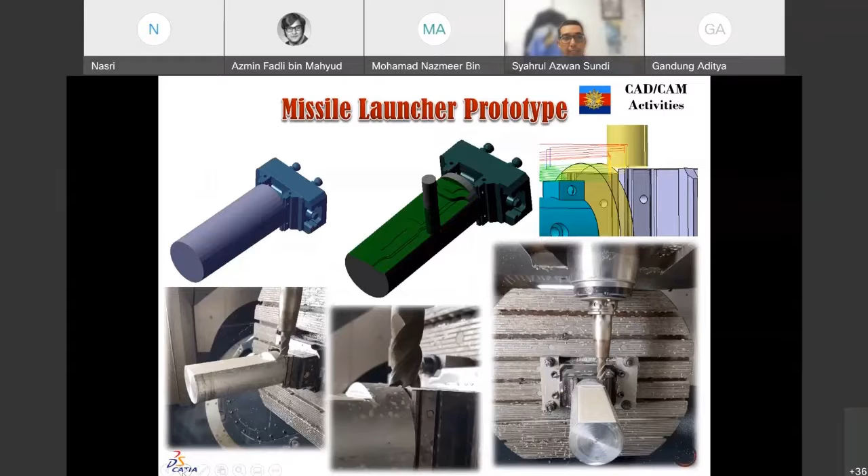So the rest is an example of application of CADCAM, various projects. I would say this is part of a project with UPNM, Universiti Pertahanan. So we have been given an opportunity to produce an example of a missile launcher. This is also machined by using 5-axis. This CADCAM system produced it in the CADCAM.

If you look over here, so this is the result of CADCAM, the result on the actual translated almost 95%, I would say. Then this is an example of the beauty of 5-axis simultaneous machining. So all the 5-axes are actually working at one time.

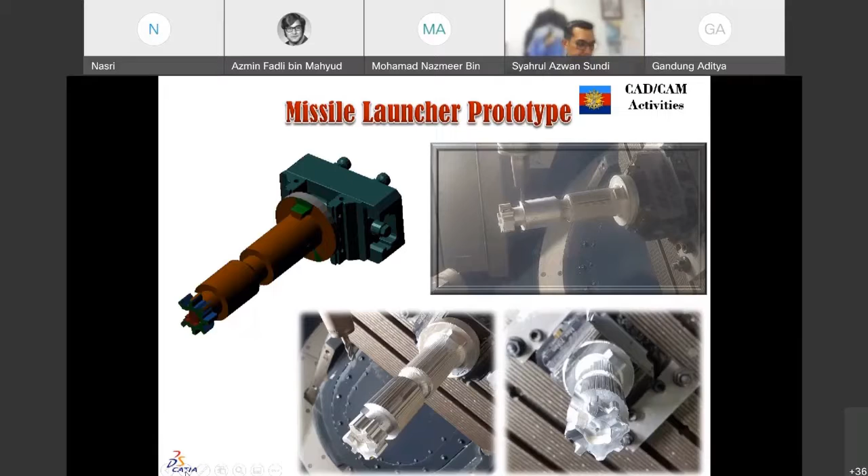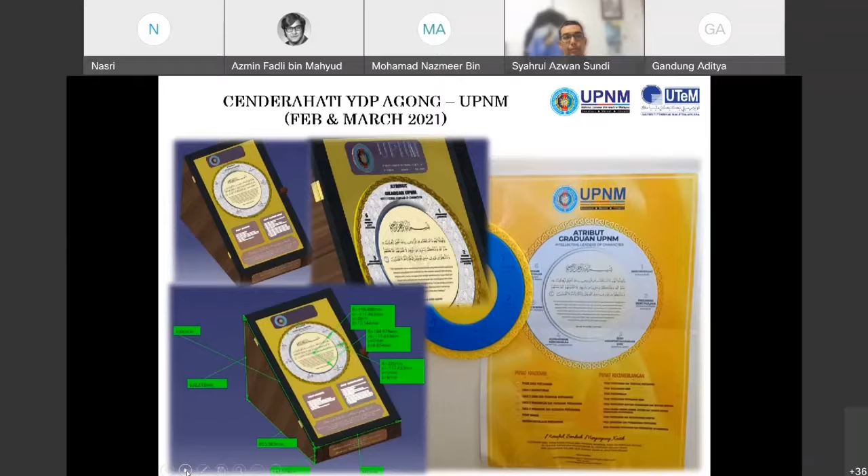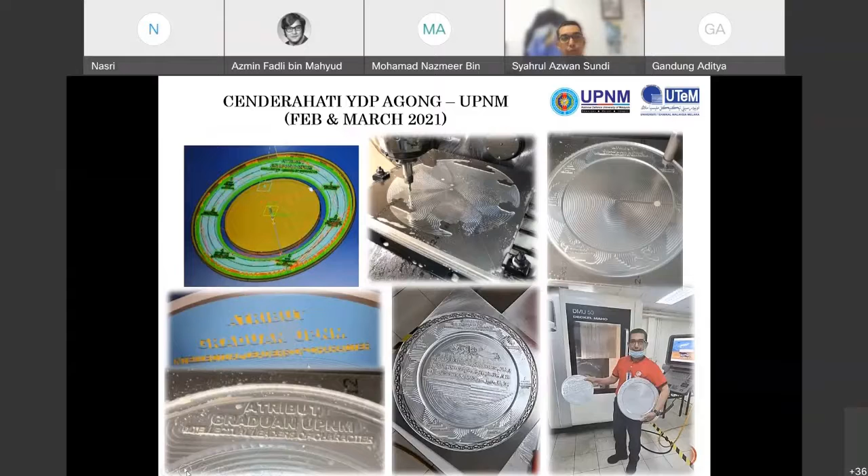Right, so the final result, then based on this, and thank God, based on this result, then we got another project with UPNM. So this is also quite, for us, a high profile project because we managed to help or assist UPNM to produce a high-end souvenir for Yang di Pertuan Agong, Your Highness. And it's a 2 to 3 weeks project, and full focus has been given to this project by the top management of UPNM. And finally, we managed to help them produce this souvenir for Yang di Pertuan Agong.

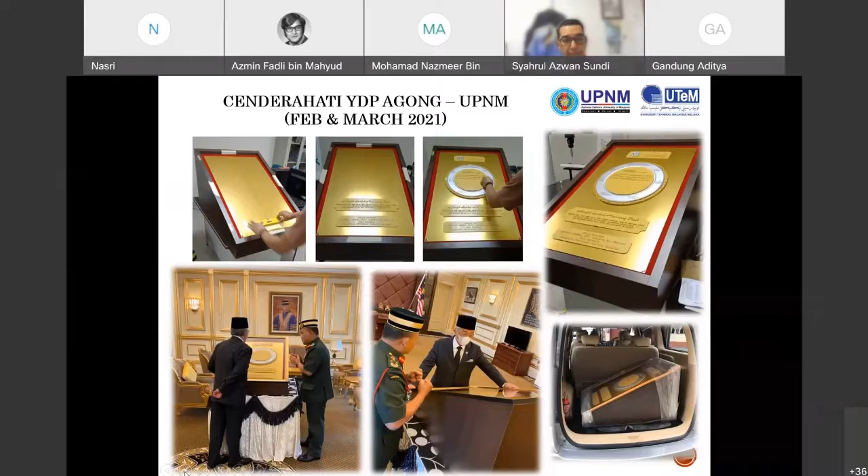So this is their Vice Chancellor presenting the souvenir to our Yang di Pertuan Agong. Okay, I think this is the last one before we end the session. Just again, a sharing from myself.

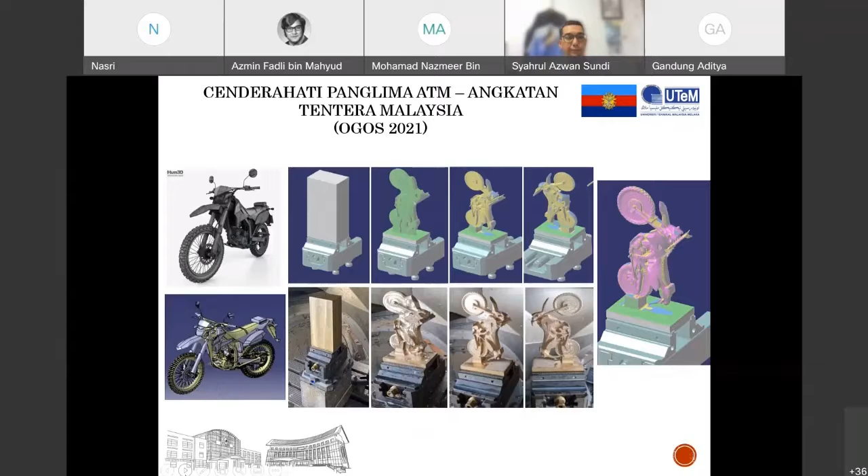An actual project with Angkatan Tentera Malaysia. It was like last year, end of last year, August, still in PKP or still in our MCO, but we managed to deliver this project with the support from the faculty, and of course, from our top management. And then it's kind of a souvenir again, to present to one of the Panglima, if I'm not mistaken, to produce this scrambler. It's quite funny when we first heard that they requested a scrambler, but we challenged ourselves, and finally we managed to produce this souvenir for them, for the ATM.

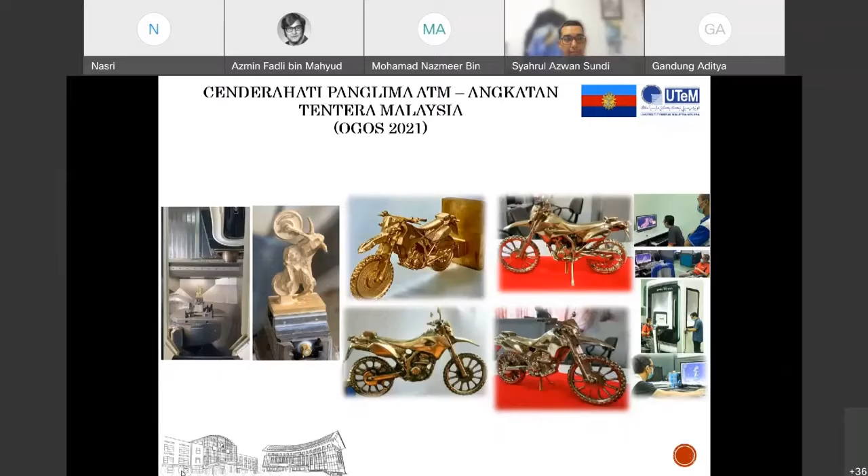And it's really interesting, I would say, to produce this kind of complex machining by using CADCAM and advanced machining system. So this is all the teammates involved. With that, I guess that's all from myself.

Thank you for the time, for PGIM, for giving me the opportunity to share. And I would really hope that with this sharing, we can have a new kind of collaboration, or probably we can have any project, for example, like work together in the future, inshallah. With that, I end my presentation and I pass the session back to Encik Nasri.